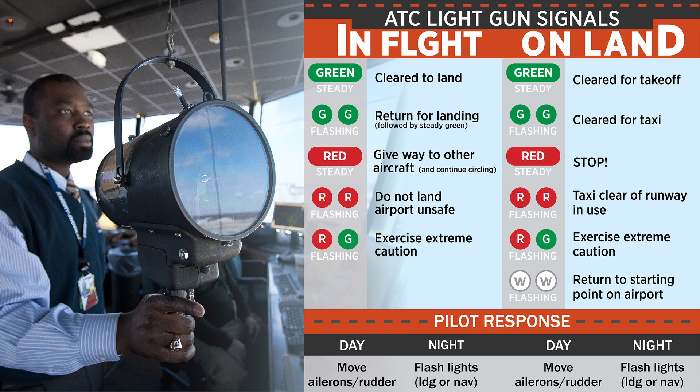So the first one is engine starting. Why is this important? Starting an aircraft engine is a specialized procedure that varies with an individual engine and aircraft. Therefore, before starting an aircraft engine, be sure to study the procedures in the appropriate airplane flight manual and get instructions from an experienced operator.

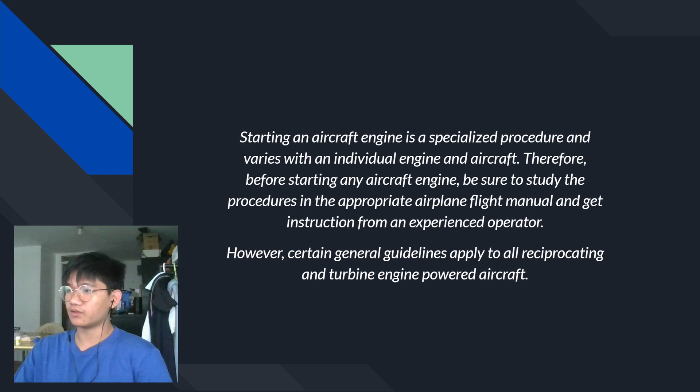Before we start the engine, we need to rely on our manual on how to start and when to start the engine. However, certain general guidelines apply to all reciprocating and turbine engine powered aircraft.

Before starting an engine, be sure to check all of the aircraft documents such as the aircraft logbook, so we have an idea and become aware of our engine's history. The aircraft logbook contains all the information of the aircraft's history and previous troubleshooting and problems that occurred during flight operations.

As I just said, it contains all of the information about the aircraft history, so we are aware and know what should be done and what should not be done. As an aviation technician, you must make sure that the aircraft is working properly under airworthiness condition.

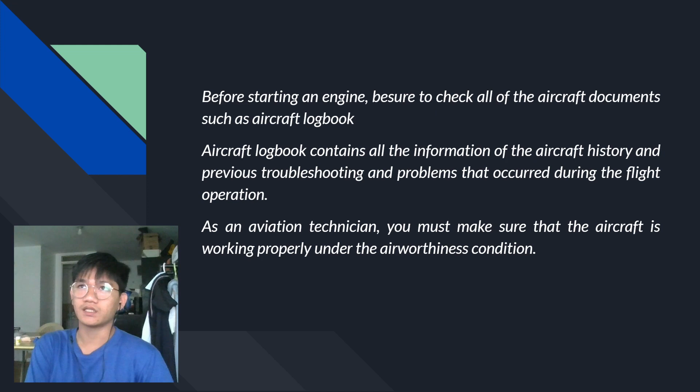Yes, of course. If we are working in the aviation industry, for example as an aviation technician, I must make sure that the aircraft is working properly, and not just working properly but relying on and complying with the airworthiness condition.

In some general aviation, other aircraft documents like the ARROW are attached along with the aircraft logbook so they can easily carry and check the aircraft. ARROW means Airworthiness Certificate, Registration Certificate, Radio Certificate, Operating Manual or Pilot Operating Handbook (POH), and lastly the Weight and Balance Certificate.

This is one, two, three, four, five. This five is important because it relies on and must comply with the regulatory body. So what is our regulatory body? It's the CAAP. We need to comply and follow these five requirements.

So the first one is airworthiness certificate - of course we need our aircraft to be airworthy. Second one is registration certificate - of course we need our aircraft to be registered before it can fly. It could fly, but it won't be airworthy.

So the radio certificate - it means that our aircraft needs to have a radio certificate to communicate with different air traffic control, tower control, and different aircraft.

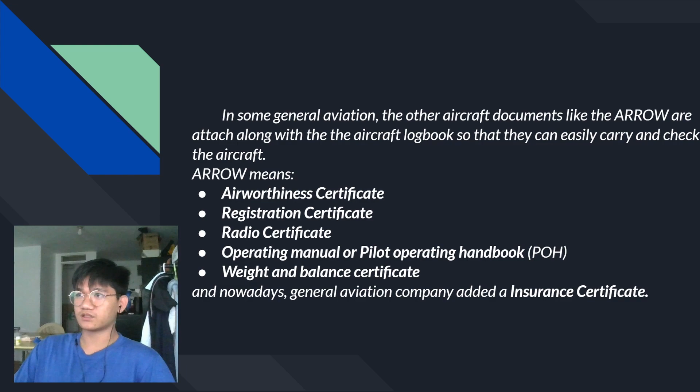And nowadays, general aviation companies added an insurance certificate. By the word itself, insurance certificate is all about insurance, so whatever may happen, we have insurance.

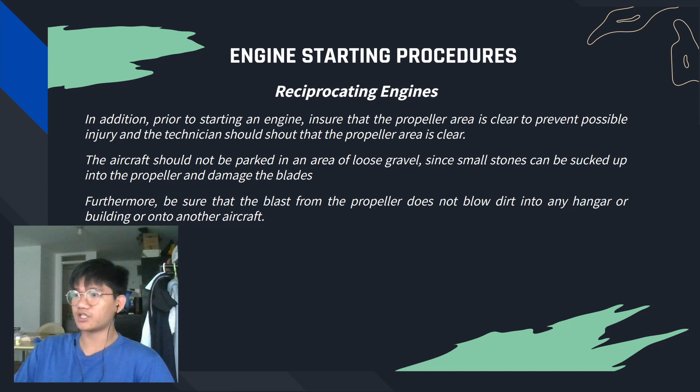So engine starting procedures for reciprocating engines. In addition, prior to starting an engine, ensure that the propeller area is clear to prevent possible injury, and the technician should shout that the propeller area is clear. Before starting the engine, we need to check if the area is clear.

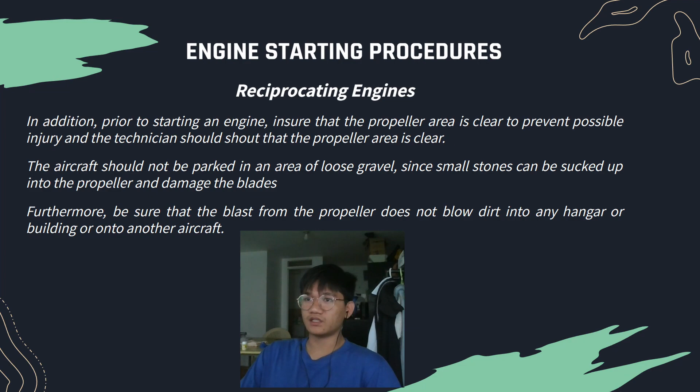Furthermore, be sure that the blast from the propeller does not blow dirt into any hangar or building or onto another aircraft. So our aircraft should be pointed in a safe direction.

There's always a possibility of fire when starting an engine. Because of this, you should always have a carbon dioxide fire extinguisher of adequate capacity available.

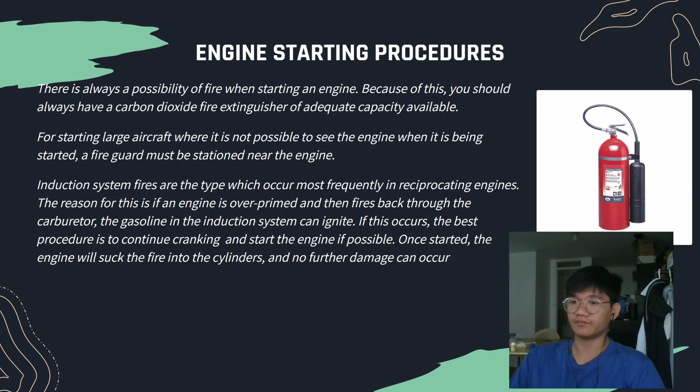During engine starting, mixture control on rich position, carburetor heat on cold or off position, and master switch must be on. So first, master switch must be on.

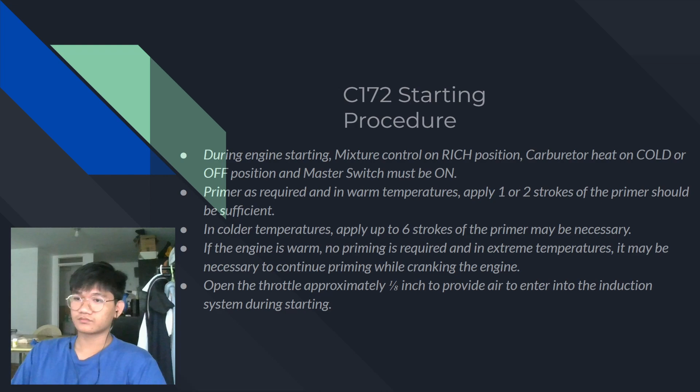Propeller area must be clear and all technicians must respond and acknowledge with the word clear. Start the starter with the starting switch or key, release when engine starts.

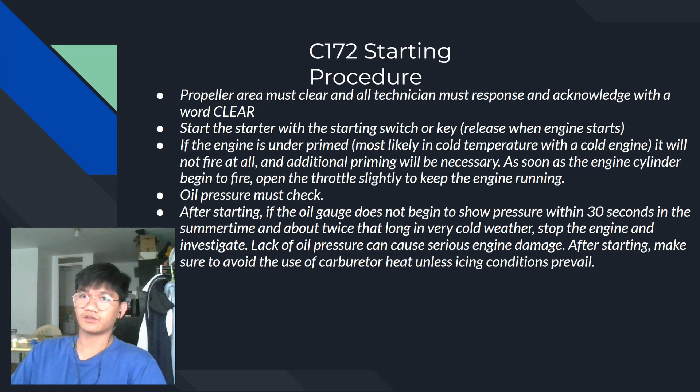A weak intermittent firing followed by puffs of black smoke from the exhaust stack indicates overpriming or flooding. Excess fuel can be cleared from the combustion chamber by the following procedures. There are three. The first is to set the mixture control full lean and throttle full open. Why full lean? Because more air enters the combustion chamber. If there's too much fuel, it will still cause black smoke because of an overrich mixture.

Then crank the engine through several revolutions with the starter. Number 3 is repeat the starting procedure without any additional priming. So what I've explained covers the basic procedures when starting the engine.

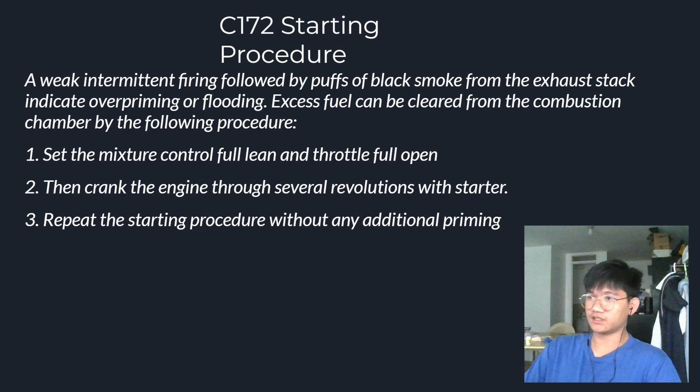Today, in this slide, I am going to explain hand propping. The word itself, propping the propeller, is a procedure with which all technicians should be familiar, as it is possible for a battery to become discharged when no auxiliary power is available. It is important that no person ever attempt to prop an aircraft until being thoroughly checked out in the procedure.

Now let's proceed to turbine engine aircraft. Turbine engine aircraft usually have enough automatic sequencing by the fuel control so that starting is less involved than starting a reciprocating engine of comparable power. But the extremely high cost of turbine engine aircraft and the possibility of severe damage in the event of an improper start make it doubly important that only qualified personnel start these engines.

One of the problems that can occur when starting a turbine engine is the lack of sufficient electrical power to get the engine up to proper speed for it to become self-accelerating in its operation. This condition can be minimized through the use of a ground power unit, or GPU, and improper starts are usually one of two types: hot starts and hung starts.

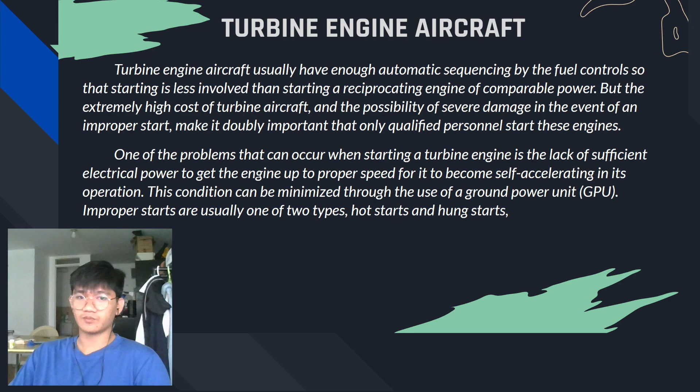So our turbine engine aircraft has automatic sequencing by the fuel control, making starting less involved compared to a reciprocating engine. For me, it's easier to start with the help of proper procedures and proper knowledge. But we need to acknowledge the possible issues that can happen, like hot starts and hung starts.

A hung start: in gas turbine engines, a condition of normal light off but with RPM remaining at some low value rather than increasing to the normal idle RPM. So once we start our engine, if it's not maintained at normal idle RPM, this is what we know as a hung start.

This is often the result of insufficient power to the engine from the starter. In the event of a hung start, the engine should be shut down. So if we have a hung start, the engine needs to be shut down.

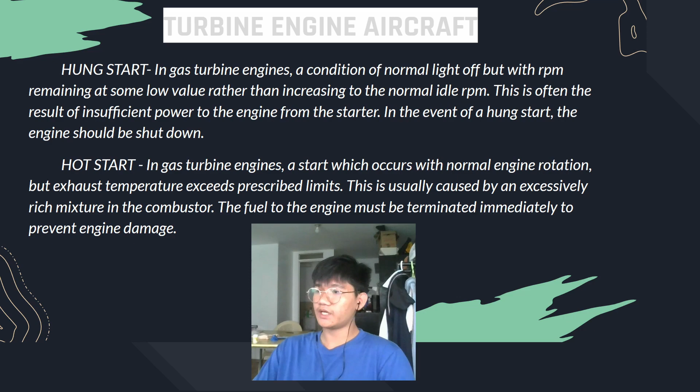A hot start in gas turbine engines is a start which occurs with normal engine rotation but the exhaust temperature exceeds prescribed limits. This is usually caused by an excessively rich mixture in the combustor. The fuel to the engine must be terminated immediately to prevent engine damage.

After that, we will now proceed to aircraft marshalling. What is aircraft marshalling? Aircraft marshalling refers to the visual communication between ground personnel and pilots in order to lead an aircraft to the correct parking position at an airport or aerodrome.

So our aircraft marshalling is, in other words, assisting the aircraft together with the pilot to park the aircraft or to guide it to a specific designated area. Marshalling is important because many pilots have limited vision both of the aircraft and of ground obstacles from the cockpit. Yes, of course, because our aircraft has blind spots. Another reason is that the aircraft has no side mirrors. Well, some have them, like fighter jets, but most commercial jets don't.

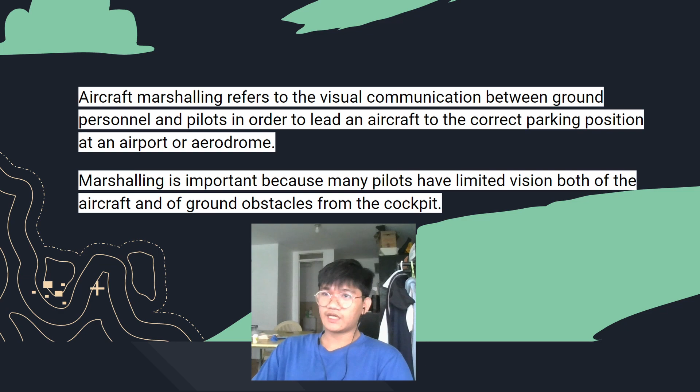Kaya kailangan natin, kailangan nating i-assist yung ating aircraft using the aircraft marshalling. So there are different aircraft marshalling signals.

Kunyari hold or standby, place yourself facing me, normal stop, turn left. Turn left is pilot's view together with the turn right. Chocks inserted. Chocks inserted again pero yung nasa taas. Emergency stop.

Pag nakikita natin dito is yung normal stop and emergency stop is may pagkakaiba. So yung normal stop is eto, nakikita natin na horizontal yung ating kamay.

Unlike sa emergency stop na magsa-start tayo let's say mga 20 degree pataas kaagad. So ganun. So start engines, tas ituturo natin kung anong engines yung isa-start. Proceed, ituturo natin kung saan siya magpo-proceed.

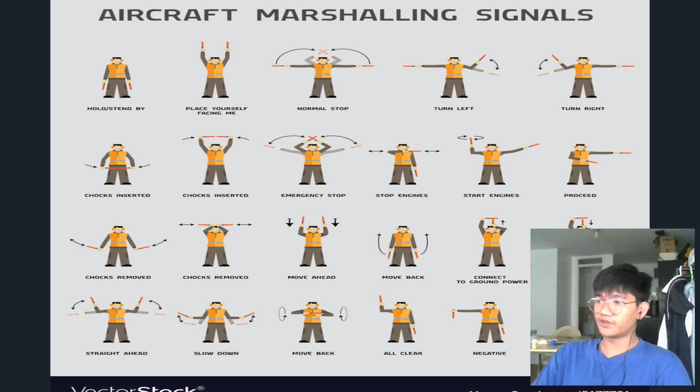Chocks removed, move ahead, move back, connect to ground power, disconnect to ground power. Straight ahead, slow down, move back, all clear, negative, establish communication.

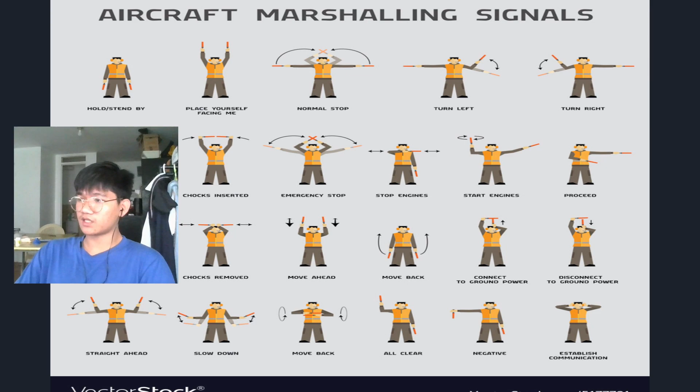When it comes to helicopter marshalling signals, may mga similarities and differences lang yan. Like for example is the hover. So ganyan lang, hover lang tayo. Land, land, then fire. Tapos ituturo natin kung engine or kung brake.

Move horizontally left, so ituturo natin sa left na pilot's view. Engage rotor. Move horizontally right, at ituturo natin together with the pilot's view. Move upwards, depart in the direction shown. Move downwards, yun lang.

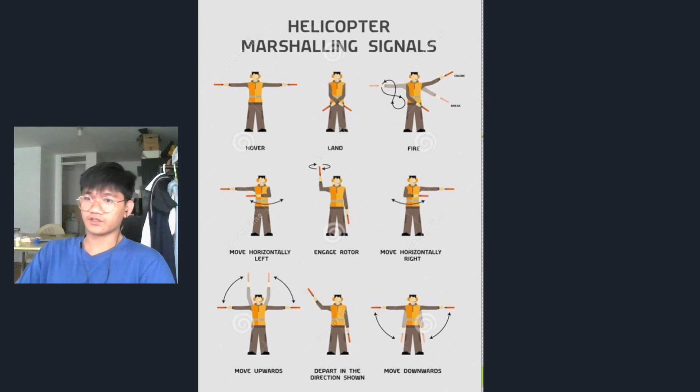So lastly is all about the light signals. Light gun. The light gun is a relatively large but still handheld projector which is aimed at the aircraft. The controller uses a trigger to transmit either a series of pulses or a continuous stream of light and may choose the color of the beam which is the red, green, or white.

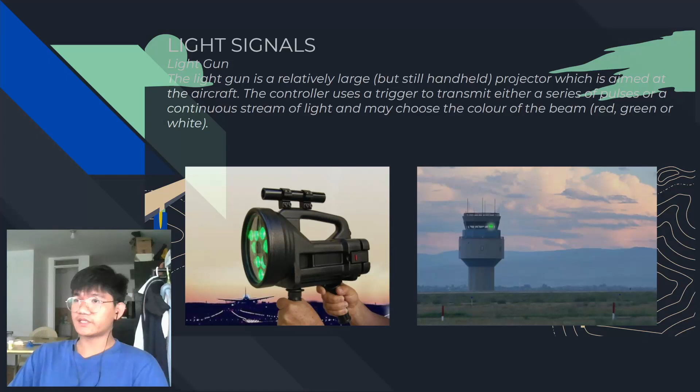Mamaya i-explain ko kung ano yung importance nito. So eto yung mga light signals natin. Kunyari, pag green tayo, yung light mode natin is green. So pag on the ground, authorized to take off if pilot is satisfied that no collision risk exists.

Pag kunyari, ako yung pilot, tas pag nakakita ko ng green light, parang ano lang yan parang traffic light. So pag nakakita ka ng green light, pwede ka nang mag-go if yung pilot or yung driver is satisfied na. And if collision risk is eliminated or no collision risk exists.

So pag nasa in-flight naman, authorized to land if pilot is satisfied that no collision risk exists. So yun daw. Pag kunyari, we are circling the airport, tapos nakita tayo ng green light from the ground. Pag nakita tayo ng green light, pwede na tayo mag-land, pero kailangan nating maging aware na wala ng collision risk exist.

So green flashing, authorized to taxi if pilot is satisfied that no collision risk exists. So that is for the on-ground, and in-flight naman, return for landing. So yun daw, pag meron tayong green flashing, authorized to taxi if pilot is satisfied that no collision risk exists. Parang same lang yan sa ating green light.

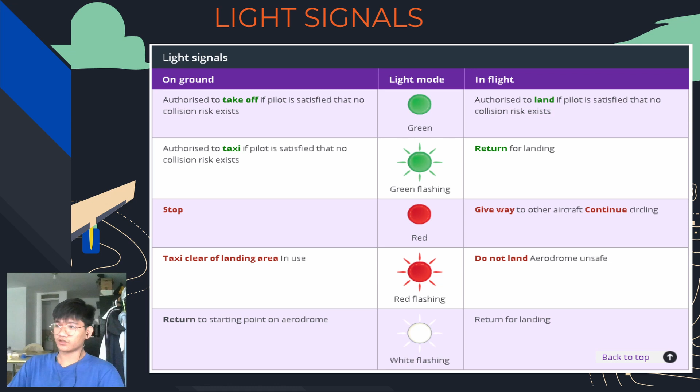So lastly is the white flashing. Pag makatanggap tayo ng white flashing in the pilot's view, on ground means that return to starting point on aerodrome. And in flight naman is return for landing.

So to have a recap, I have discussed to you the engine starting and the ARROW, which is the airworthiness certificate, registration certificate, radio certificate, operating manual or pilot operating handbook, and the weight and balance certificate, and with the additional of the insurance certificate. I also discuss about the engine starting procedures of the reciprocating engines and the turbine engine procedures.

Sa reciprocating engine procedures, there are normal starting procedures and the hand propping. So after that, I have discussed then yung aircraft marshalling, so the difference and similarities ng airplane marshalling and the helicopter marshallings. And lastly is I have discussed the light signals, which uses the light gun to communicate to the aircraft.